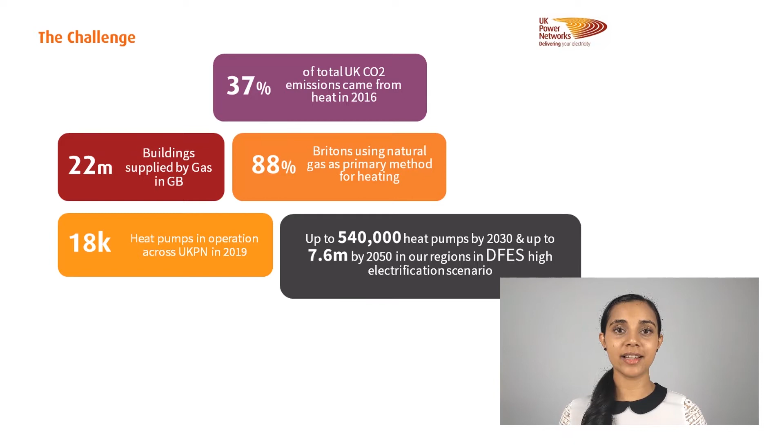The government's ambitious net zero by 2050 target is a strong driver to improve the environment, which is something that's very important to me and we know is the highest priority for our stakeholders. Heat decarbonization is at an early stage as well, with a lot of questions yet to be answered. We have a real opportunity here to make a big difference in a lot of lives as we pursue a cleaner future for heat. I'm excited to be at UK Power Networks, where we are at the forefront of understanding heat decarbonization and taking concrete actions now to not only enable but to accelerate the net zero target.

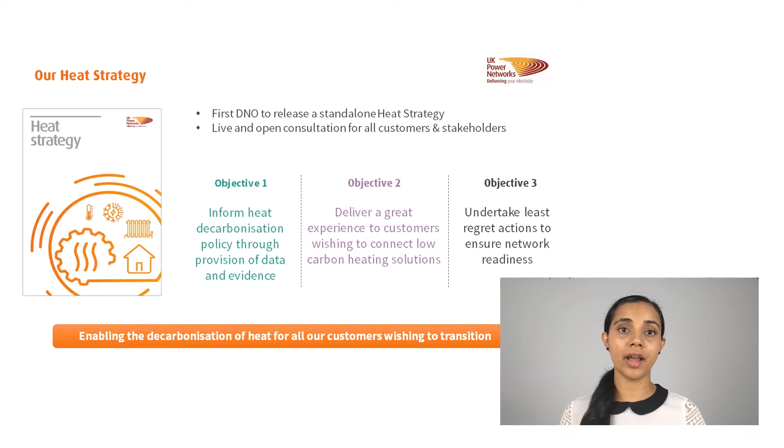At UK Power Networks, we take great pride in connecting with and hearing from our stakeholders to drive our actions. We believe this is essential in order to deliver on our vision of being a respected corporate citizen and sustainably cost efficient. Tackling the challenges of decarbonizing heat will require a high rigor of engagement and collaboration, which is something UK Power Networks is well equipped to do, and we are doing in this area. Stakeholders have told us that factors such as lack of policy and lack of awareness are some of the key barriers to the uptake of low carbon technologies.

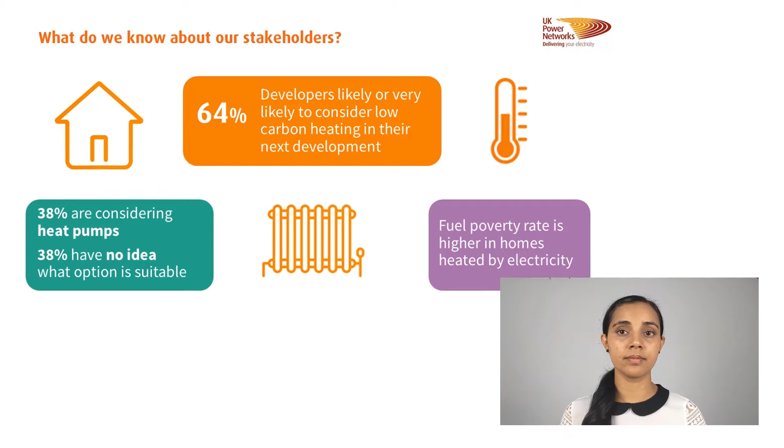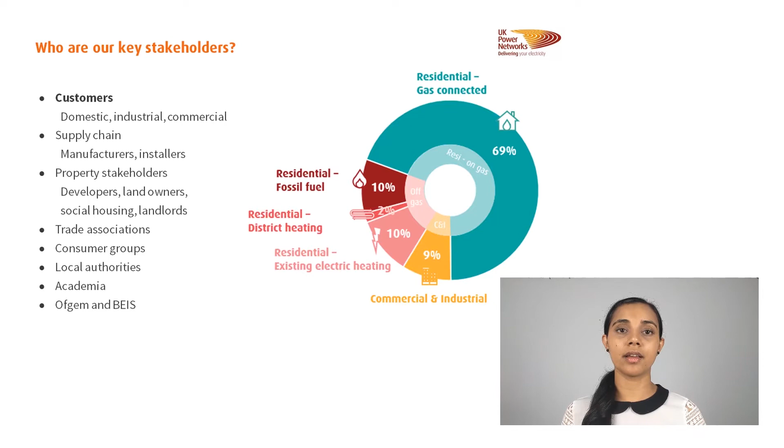Collaboration is paramount to navigating those challenges. It will enable us to address concerns such as low visibility of LCT uptake, higher network reinforcement and service alteration costs, unclear path to the future of heat, customers who are unaware of the need to decarbonize, and even leaving behind disadvantaged or fuel-poor customers. No one party has all the answers, so we must work together with communities, local authorities, and installers, for example, to enable us to jointly unlock economic, environmental, as well as social benefits.

Through Community Heat, the people of Barkham are helping UK Power Networks create a model community roadmap for reaching a zero-carbon heating future for off-gas grid areas. These communities rely on very carbon-intensive options, such as oil, coal, or wood chips to heat their homes and to cook. UK Power Networks will work with community energy groups and local partners to research, gather data, and compare approaches for reducing the village's carbon emissions from household heating.

We're conducting deep engagements with over 600 residents through our project partner Avesco, and building network and techno-economic models through our other project partner Buro Happold to explore the different decarbonization options available. One of the ways we're actually going to do this is by installing meters to help us understand the residents' winter energy usage this year.

The data we collect and the simulations we run will investigate the costs, efficiency, and electricity network impact of multiple different approaches, including shared district heating, medium-sized heat pumps serving a few properties, or even the personal electrical heat pump installed at each property. We'll also be looking at potential community finance models and analyze how other smart technologies, such as electric vehicles and solar power, could play a role.

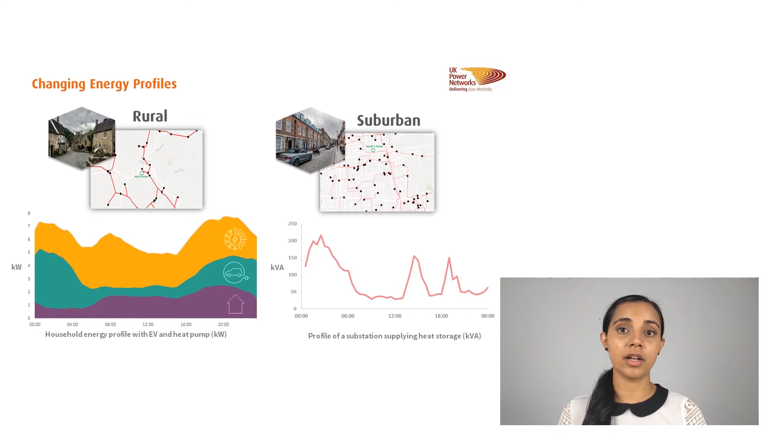With a clear plan in place, residents will understand what a low-carbon future could look like. The research and trial design study will be replicable across the UK to the 4 million properties like those in Barkham. The net zero targets are quite ambitious and will require everybody to do their part. With such a large-scale change expected in such a short period of time, communities need to be at the heart of the solution. There is a lot of untapped opportunity to reduce emissions within communities. Through the Community Heat project, for example, we're exploring the benefits of a coordinated approach to heat decarbonization versus the uncoordinated approach where each customer decides on their own solution.

We believe it would be beneficial for consumers as well as the network to pursue a coordinated approach. By working directly with the community, we empower them to work together and achieve net zero and give them the tools needed to have a new type of energy system.

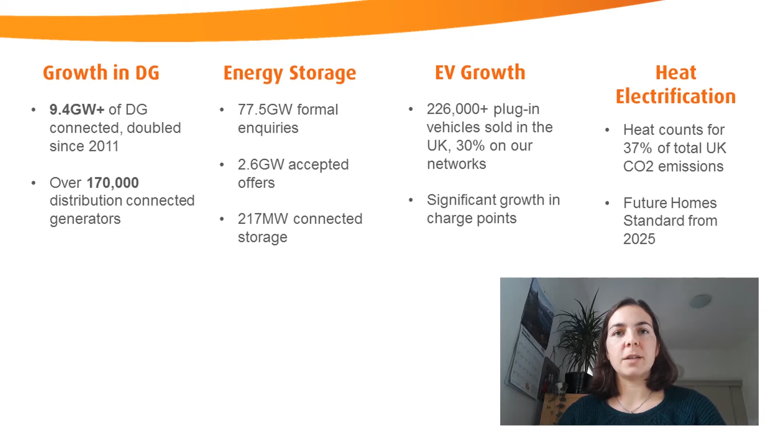Over the last 10 years or so, we've seen huge strides forward with renewable energy connecting to the distribution network. And in the last number of years, we've also seen a huge increase in the prevalence of electric vehicles on the network. One of the next major sources of carbon dioxide in the UK, which must be reduced as we proceed towards net zero, is heating.

As electricity networks prepare to facilitate the net zero transition, we are continuing to receive feedback from customers and stakeholders that it really is an area we should continue to focus more on. Customers quite rightly expect that the electricity networks that supply them are going to be innovating to ensure that we can progress to the net zero transition at best value for everyone.

Another really important area of the net zero transition is making sure that we are looking after those in need, people who may be experiencing fuel poverty or living in other vulnerable circumstances. And we need to make sure that we innovate to ensure that we facilitate a just transition for all and not leave anyone behind.

I think we have a good understanding in industry why the decarbonisation of heat is so important to the work that we're doing now and looking forward into the future. The Heat Street project is a research project that we recently started to really start to understand more about heat decarbonisation and what it might mean for electricity networks going forward.

As we know, as heat decarbonisation progresses, we're likely to see an increasing number of heat pumps that are electrically powered throughout our network. To date, we've had about 20,000 domestic heat pumps installed, and by the end of 2028, we expect this to increase by a factor of 10. So we'll have about 200,000 heat pumps on the network.

We've worked with industry bodies and local councils to better shape our forecasts to understand if we've missed anything or just to check that our views are broadly in line with what our customers and stakeholders are experiencing.

We've worked really closely with the Association for Decentralised Energy throughout this last year as we've produced our heat strategy. They do a lot of active work in the policy space and recently put out their zoning paper, which puts out their view for how zoning can be used to decarbonise areas at best value.

This plays hand in hand with local area energy plans. And the idea of zoning is that specific areas could be zoned for specific things. So you might have a hydrogen zone, you might have a heat pump zone, you might have a heat network zone where the legislation changes to say, actually, if you're building new properties in this area and there's an existing heat network, you are obligated to connect to them. And the idea is that this will provide a framework that can be used to support councils to make decisions that will ensure a green future.

At the end of the Heat Street project, we're going to be publishing results in a similar way to our DFES project. That means that low carbon heating and energy efficiency uptake scenarios will be visible in Excel spreadsheet format, and that will be for all across the UK Power Networks areas.

We are definitely on a journey with heat decarbonisation, and we are continually looking for opportunities to engage with other stakeholders and customers, as well as pursuing new projects. So if you have an idea in this space, please don't hesitate to get in touch.

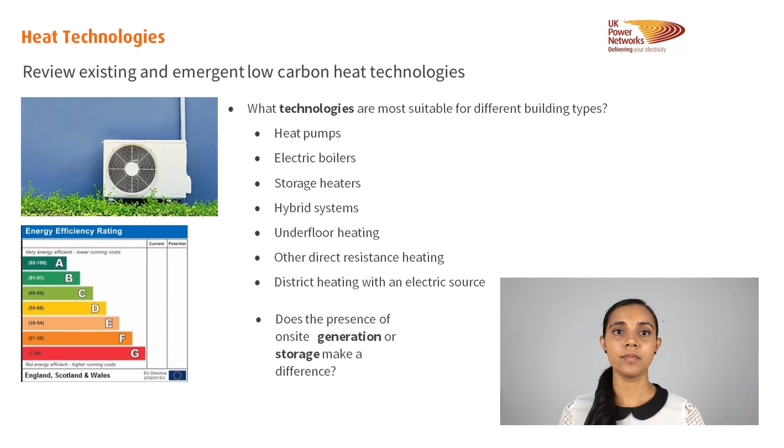It's actually a win-win because it will also help save consumers money on their bills, given that their overall energy use for heating will be less. On the network side, a combination of energy efficiency measures and low energy consumption can reduce the potential peak load on our network. That means there's more capacity left to connect other technology like renewable energy, which can help us further facilitate net zero and avoid costly network infrastructure upgrades.

What we've seen through our Low Carbon London project and other studies is that the load curve for heat pumps connected to our network has a peak in the morning and in the evening. This makes sense. As people get up in the morning and get ready for their day, they'll increase their energy use, say by turning on their lights, adjusting their heat, and making their breakfast. In the evening, we can see a similar peak as the household load increases at dinner time after people return from work. That represents a typical load curve, but it may be changing with COVID-19 and people working from home.

Energy efficiency also means that people could participate in flexibility services. They could flex their demand, meaning the electricity is on earlier in the day or a little later at night, without compromising on a warm home because of the improved energy efficiency.

Through Firefly, we also looked at the potential for energy efficiency to help defer network reinforcement. As part of this project, we analyzed the EPC ratings at households around a selection of some of our substations. We found that there was good potential for energy efficiency upgrades to get higher ratings. This is great for consumers because it means there is a potential to reduce energy bills while helping networks reduce the overall load on the network.

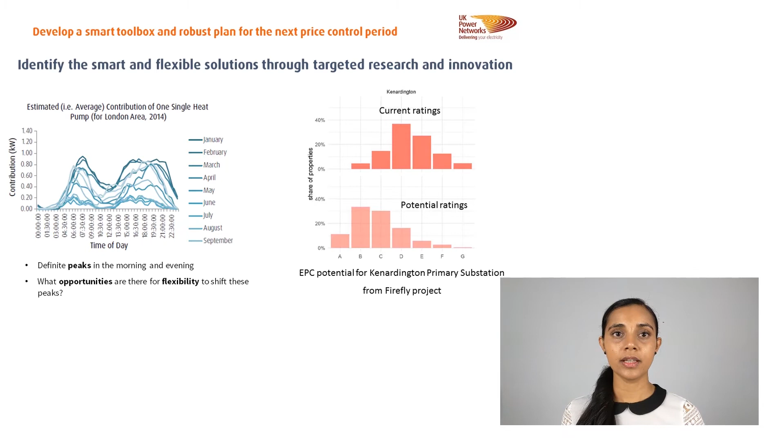The findings from the project have fed into Rona's Heat Street project, which she talked about earlier. Heat Street is building on the concept, but going further to specifically forecast and identify which measures would be most useful in specific areas. As Rona said, in some areas, certain energy efficiency measures may make sense, but in others, different measures might be more effective.

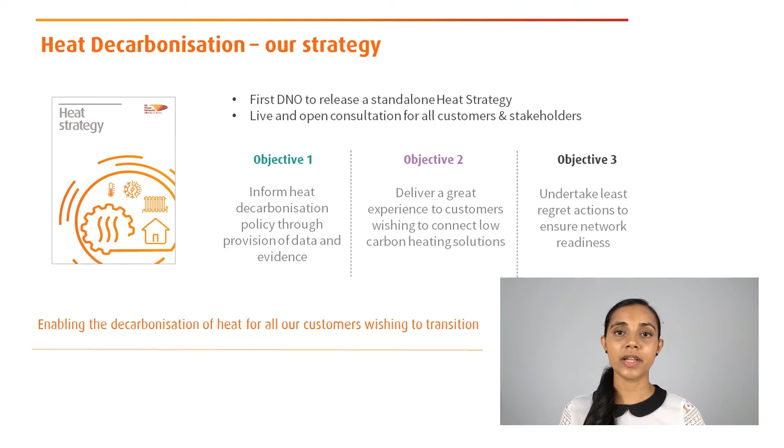Another pathway we're currently exploring to deliver a great service experience to our customers is by exploring the hybrid pathway. Hybrids mean a combination of electric heating with green gas, or in the future even hydrogen, that could be used to heat homes around the UK. We've partnered with the gas network, Wales and West Utilities, and a technology partner, PassivSystems, to break new ground on the HyCompact project. This project will run from winter this year until April next year. In the project, we're installing new hybrid systems in energy consumers' homes alongside smart control software.

We're installing 6 of the new devices at homes in UK Power Networks and Wales and West Utilities areas. The aim of the project is to explore the customer journey, understand how the devices are used and what energy efficiency savings they can make, and explore the potential for flexibility offered through the new equipment.

The unit we're installing is a single unit hybrid heating system. Most other units have a separate electrical heat pump and a boiler, which means they can be larger and not as easy to install or run for consumers. A single unit hybrid system, therefore, can make it as easy as possible for consumers to make the switch to low carbon heating. The systems will be fitted directly into the customers' homes and hung on the wall in the place of their conventional gas boilers.

With the smart control software, the equipment can flexibly switch between electricity, gas, or occasionally even use both at the same time. The device decides based on cost, the amount of carbon being used, or whether there's a peak in demand on the network. HyCompact will enable us to understand the role that hybridization might play in helping us facilitate a net zero, low carbon heating future for our customers. This will unlock benefits for all and make sure everyone can access those benefits.

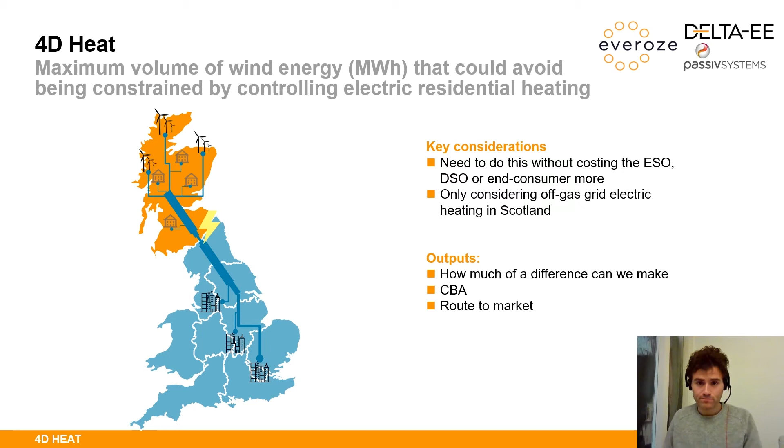In terms of the key outputs, we wanted to identify the difference we can make with a domestic turn-up service to overall wind curtailment, look at the cost benefit of doing this, and lastly, examine the route to market to make this all happen. The modeling that we did for the project was based on scenarios that isolated the differing effects of installing smart controls, offering homes a financial incentive to increase the demand at times of curtailment, and adopting time of use tariffs, which reflect the wholesale electricity price plus variable distribution use of system charges, such as the Octopus Agile tariff structure. We also looked at two different modeling years, 2020 and 2030.

In our 2020 modeling, we took account of the legacy environment of RTS homes, which are homes that have a type of electricity meter with an inbuilt remote control mechanism that uses BBC long wave radio to allow for scheduling of storage heater and hot water demand to avoid distribution network constraints. There are a significant number of homes with these RTS meters, with over 1.6 million RTS meters currently in operation across GB.

So the 2020 cases represented a business as usual type case, and we looked at the additional effects of installing smart controls as well as explicit wind incentivization. And we also looked separately at addressing the RTS homes versus leaving the RTS homes as is. In our 2030 scenarios, we assumed all the RTS homes were converted and there were no more RTS meters. And we looked there at the full effects of smart controls, the explicit wind incentivization, as well as the dynamic time of use tariffs.

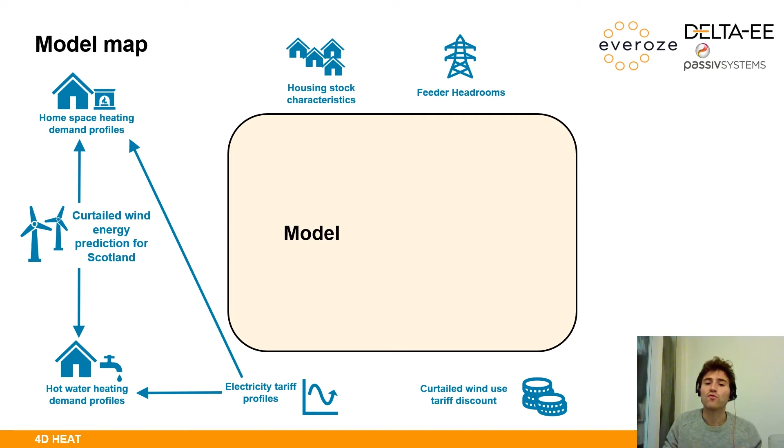The modeling also drew into the kind of central modeling that we did, the overall housing stock. We also looked at the low voltage feeder headrooms available to ensure we didn't exceed the network capacity of the low voltage network. And lastly, we also needed the information on the curtailed wind use tariff discount. So essentially the potential value or the incentive that the ESO could provide for homes to turn up their heating at times of constraint.

And what the model did then was select on a day-by-day basis the most cost-effective demand profile for each home, whether that be reacting to a normal tariff profile or following the wind curtailment profile. So essentially at all times we were acting in the home's best interest, minimizing their costs, subject to not breaking the low voltage distribution network.

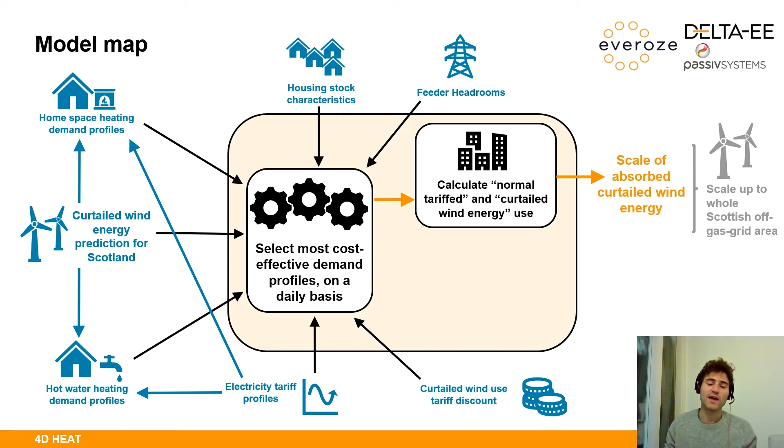We also from this calculated for each home the normal tariffed energy used, as well as the otherwise curtailed wind energy used. And from that, we could then calculate the total amount of curtailed wind energy absorbed, and then this was scaled up to all of Off Gas Grid Scotland. Separately, we could calculate the system costs in each case for each home in each scenario, and we use this as an input to our CBA.

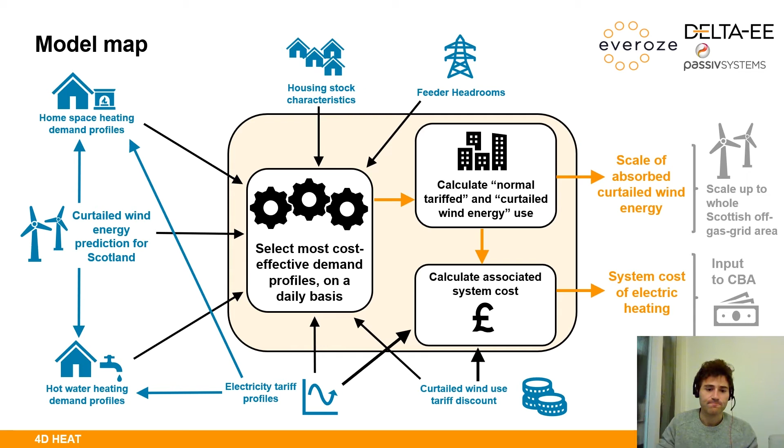Taking a look at the main findings for the 2020 scenarios, first looking at excluding the RTS homes, we saw that you can get a total reduction of 54 gigawatt hours of otherwise curtailed wind. This amounts to about 4% of the total wind curtailment forecast for 2020. And we see a lot of this is actually made up by the indirect effects of adding smart controls. And then further, this is boosted by explicitly incentivizing homes to consume wind at times of curtailment.

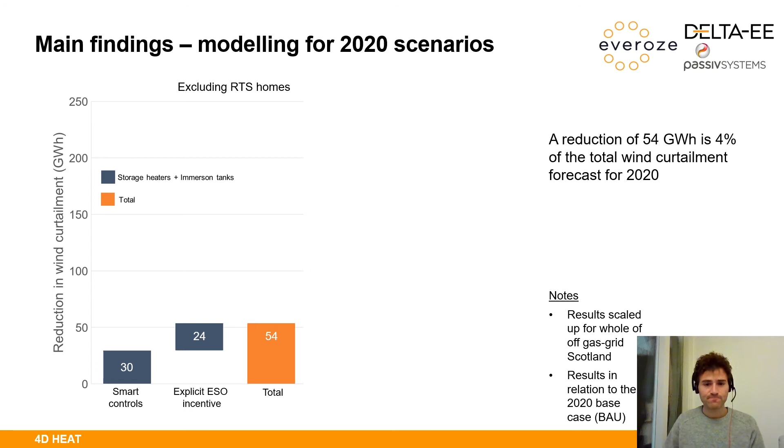If we include the homes with RTS meters, we can significantly increase the otherwise curtailed wind consumed. And here we have a total of 222 gigawatt hours, and this amounts to 17% of the total wind curtailment forecast for 2020. Once again, with a large portion of this just being made up through the indirect effects of fitting smart controls.

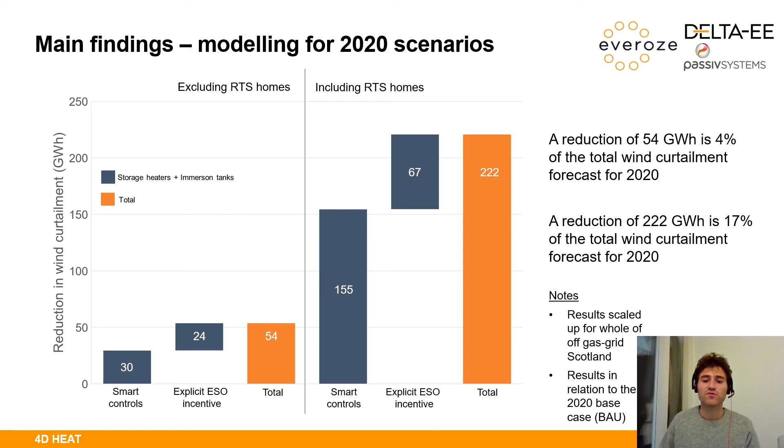Taking a look at our 2030 scenarios, we see a much higher total of otherwise curtailed wind energy consumed at 540 gigawatt hours, and this amounts to about 9% of the total wind curtailment forecast for 2030. Looking at how this is made up, you can see once again there's a significant portion that comes from adding smart controls, what just smart controls themselves do.

Looking at the next batch of results along, we see that dynamic time of use tariffs also allow a further significant proportion of otherwise curtailed wind to be consumed. And this, on the surface of it, actually can be seen to be fairly obvious in the sense that you would expect that the dynamic time of use tariff profile would reflect low costs at times where there's a lot of wind on the system and potentially being curtailed.

And lastly, we see that additional benefits, roughly say a third of the additional final benefit, comes from having an explicit incentive to consume wind at times of curtailment. So essentially we can get quite a way of the way there just by relying on, for example, smart controls and dynamic time of use tariffs.

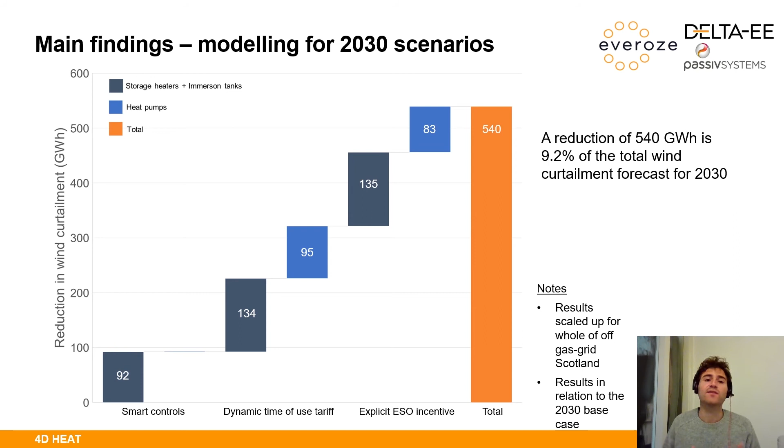This chart also shows that even though we have many more heat pumps in our 2030 scenarios, a lot of the kind of heavy lifting is being done by the storage heaters. And this is just because they consume a lot more power than the heat pumps, which are operating with a much higher coefficient of performance.

Taking a look at the main findings of the cost-benefit analysis, first up, I want to be clear that the 4D heat concept delivers significant system-wide benefits that range from £11 million in the worst case scenario that we looked at to £304 million of benefits in the best case scenario that we looked at. And this is all on a 10-year net present value basis.

Looking at where these benefits arise from, the majority of these benefits in most cases arise just from the direct benefits of fitting smart controls and optimizing home heating, whether this be just generally or in accordance with time of use tariffs.

There's also significant benefit from the avoided wind constraint payments, and further additional benefits come from the environmental and societal benefits that are largely comprised of avoided CO2 emissions. I've put on the slide here the per year savings for the ultimate case we looked at, where we had the smart controls implemented plus the dynamic time of use tariffs, as well as an explicit incentive to consume curtailed

wind. In terms of what this all translates into payback-wise, looking at the system-wide payback, in our 2020 scenarios, this ranged from about 4.5 to 6.5 years across the different scenarios. And in 2030, the paybacks range from as little as 1 year to about 7 years.

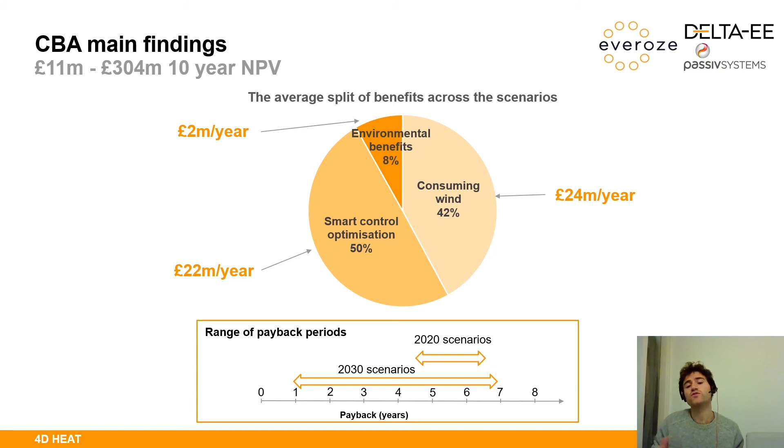The headline conclusion is that flexing Scottish off-gas grid domestic electric heating can result in reducing the amount of wind generation needing to be curtailed. This can also provide substantial costs and CO2 savings. Such an arrangement could result in avoiding up to 17% of curtailed wind in 2020 and up to 9% of forecast curtailed wind in 2030. And this could save in the region of £24 million per year in avoided constraint payment costs alone.

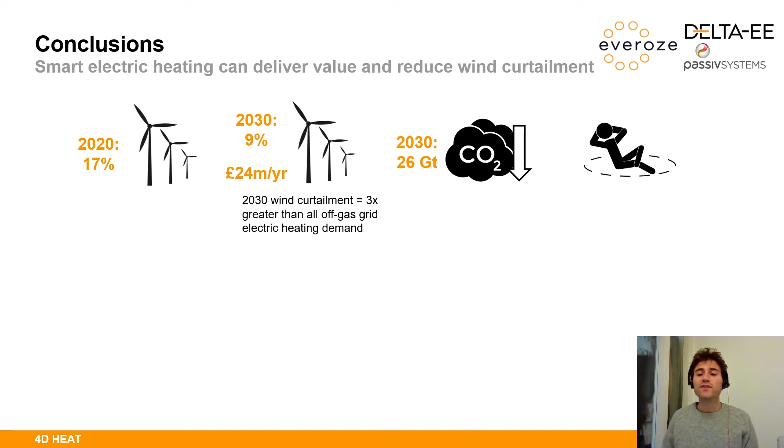There are, however, some fundamental limits to the use of electric heating for managing curtailments, and I thought I'd just draw this out by highlighting the fact that by 2030, the magnitude of curtailed wind will be more than 3 times greater than the total annual space heating and hot water demands of all electrically heated homes in off-gas grid Scotland. So very clearly there are some limitations to what we can do here. However, in addition to the direct household cost savings, there's also significant added benefit of improved thermal comfort levels through the fitting of smart controls.

Our work has shown the importance of all 3 mechanisms when it comes to accessing domestic heat flexibility to help reduce curtailment. And that is, firstly, smart controls which optimize heating systems. These deliver significant financial and environmental benefits in their own right. Then there are the time of use tariffs. They were significant in further reducing the amount of wind curtailment, and our analysis demonstrates that market-led time of use tariffs provide a strong signal for households to modify their heating loads. And lastly, we have the direct wind consumption financial incentive, and this also reduces the amount of curtailed wind otherwise.

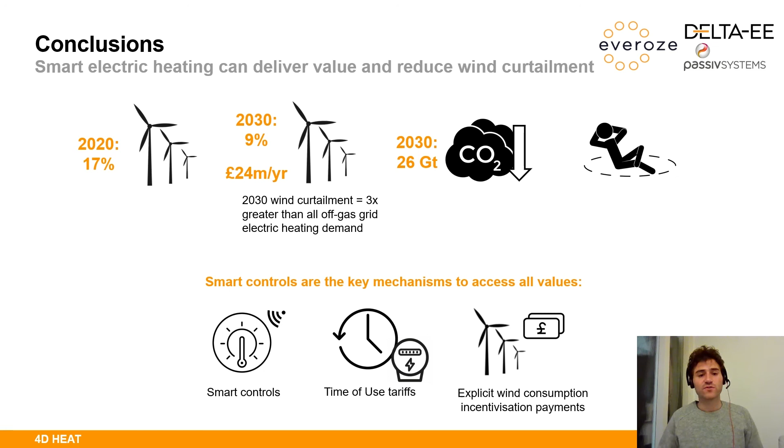Taking a look at the key recommendations arising from the 4D Heat project, when we started the project, we suspected that some of the key recommendations might center around continuing to reform ESO and DSO services, as well as refining our work through further analysis. While these recommendations do hold true, we uncovered a number of other unexpected recommendations. That leads to point 3: DSOs and the ESO being a proactive voice on energy supply market reform, for instance by advocating an acceleration of mandatory half-hourly settlement. And this recommendation comes from the fact that we saw so much benefit from the homes adopting those dynamic time of use tariffs.

And point 4, supporting the evidence base for smart controls. Smart controls deliver significant benefits, and we need to ensure now that heating assets being put in are fully controllable. On point 5, in terms of adopting a market-enabling role for industry innovation, there may be a role for wind developers and operators to work more closely with end users through novel local energy market mechanisms. This might be supported by government, but it also requires collaboration from DSOs, for instance by adopting a market enabler role on network capacity trading.

And finally, a further example of looking beyond silos, we know that a large focus of Ofgem's is vulnerable customers. So we need to think, how might DSOs and the ESO support fuel-poor homes to make them heat flexibility ready? What this all adds up to is the need for a whole system real-world view. On whole system, 4D Heat highlights there's a strong case to engage even more proactively with wider energy market reform and end-user propositions. And on real world, so many of the issues to address are practical. They require coordination of actors and new commercial and customer propositions. It's time to be probing real-life empirical efforts, not just testing abstract concepts. So it's certainly been a journey and one that's challenged us to think much more expansively.